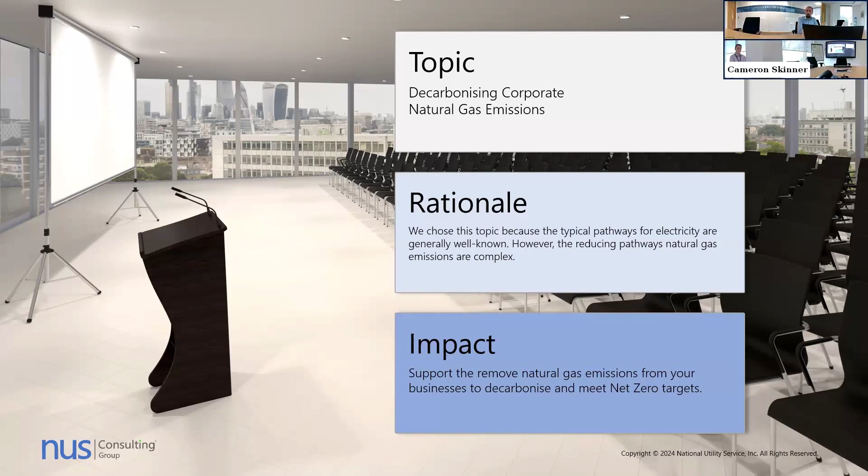So we will be guiding you through the process of the different levers available, what can be pursued on a short to long-term measure, and what that might mean for your particular company, your industry and broader sector. As part of that conversation, we will showcase the broader impacts, taking into consideration your requirements to reduce emissions with any net zero targets you might have in place or on the horizon.

Before we get into the more granular details and options around natural gas decarbonisation, it's worth reiterating the importance of decarbonisation for your company.

Under the requirements of the GHG protocol, there are various elements under carbon footprinting accounting, broken down into individual scopes. Scope 1 covers your natural gas consumption alongside corporate vehicle emissions and fugitive emissions, such as those from leakages in HVAC systems across your portfolio. Scope 2 primarily focuses on your electricity consumption.

There are 15 different upstream and downstream categories under scope 3, which vary considerably from business travel to purchased goods and services, employee commuting, and tracking the emissions of any products you manufacture and sell across your broader business operations.

From our experience working with large industrial and commercial organizations, scope 3 emissions typically account for anywhere between 75 to 95% plus of a company's overall carbon footprint. That can be higher again if you are directly manufacturing industrial products which require energy as part of their usage once they leave your factory and operations.

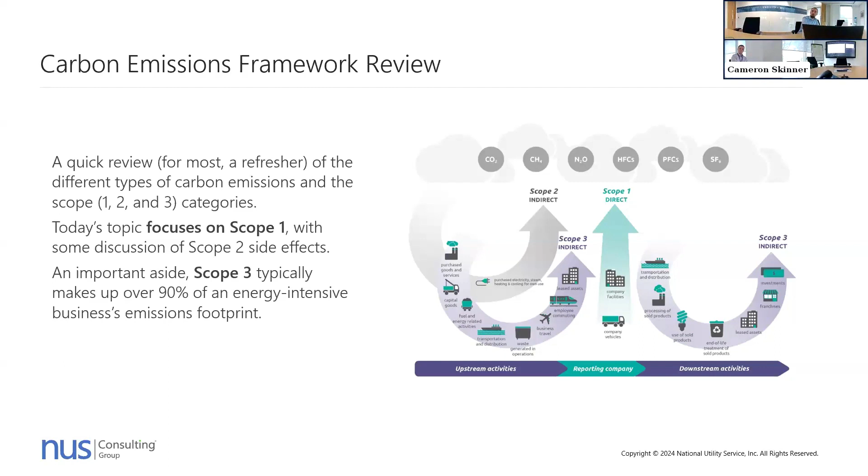To clarify why we are focusing on natural gas consumption, there are various considerations to be taken into play in relation to reducing natural gas consumption across your portfolio.

In terms of short-term requirements, any company with a net zero or decarbonisation target currently being developed or reported externally will be required to showcase they are proactively reducing emissions across their portfolio, including natural gas consumption, where you have the direct ability to make changes to how your business procures natural gas or carries out any business operations. Any clients currently aligning with or looking to align with the Science Based Targets initiative will...

...be required to quantify all of their consumption associated with natural gas and then publicly commit to reducing those emissions quite rapidly over the next 6 years up until the 2030 timeframe. Typically, companies currently aligned with the SBTi would be expected to reduce natural gas emissions by 50% by 2030.

Any company with a net zero target in place by 2040 or 2050 will be required to fully remove natural gas consumption from their business operations or replace it with a renewable alternative. As mentioned, natural gas consumption is under your direct and immediate control, so companies are expected to showcase they are proactively making changes to reduce natural gas consumption.

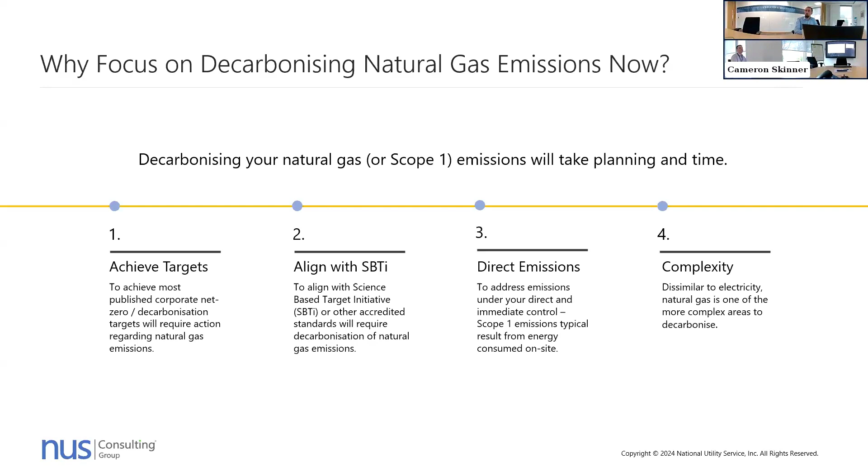The discussion will focus on 5 main decarbonisation levers focusing on natural gas consumption, including biomethane certificates, renewable gas supply, energy efficiency, electrification, and on-site generation.

These options vary considerably, from market-based measures such as purchasing biomethane certificates or renewable gas supply, through to more proactive measures such as energy efficiency and the electrification of your natural gas consumption.

As we will showcase, all of these have a variety of broader sustainability reporting implications, costs, and changes to the way your company carries out heating and manufacturing processes across individual sites.

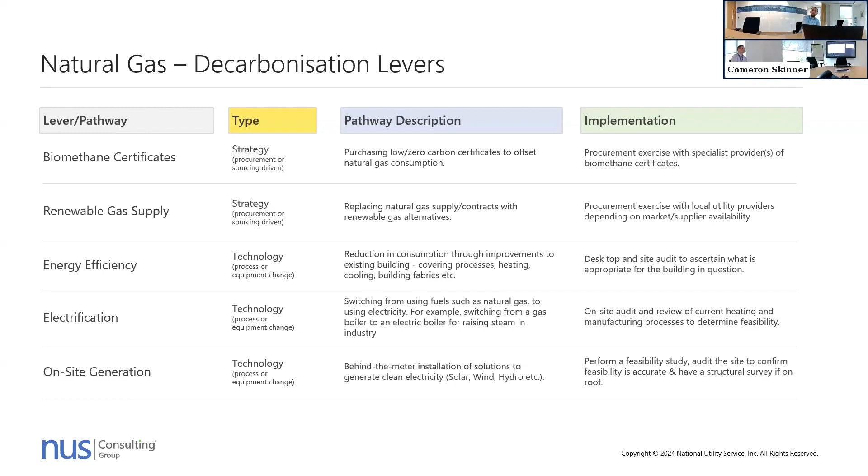To start with the first lever, one option available for commercial organisations to reduce natural gas consumption takes the form of biomethane certificates. In relation to electricity, for instance, the market is currently very well developed in relation to energy attribute certificates. In the UK, we have renewable energy guarantees of origin, or REGOs.

Across Europe, we have guarantees of origin, GOs. Across the United States and Canada, we have renewable energy certificates, or RECs. They have been in place for a number of years, are very well regulated, and allow companies to directly purchase them to report a direct reduction in their electricity consumption. It hasn't currently been the same situation for the natural gas sector or for biomethane certificates.

At the moment, the biomethane market, both for supply and certificates, is in the very early stages of development.

But there are options for companies to purchase biomethane certificates, also known as renewable gas guarantees of origin, or RGGOs, as part of a procurement exercise to purchase renewable certificates for gas consumption. They are typically generated per 1 kilowatt hour of generated biomethane, and can be purchased across a limited number of markets. At the moment, there is some market development across the UK, parts of Europe, and specific states in the USA. In comparison to the electricity market, the certificates are still developing in relation to regulation and trading, but we expect to see some advancement in this area in the coming years.

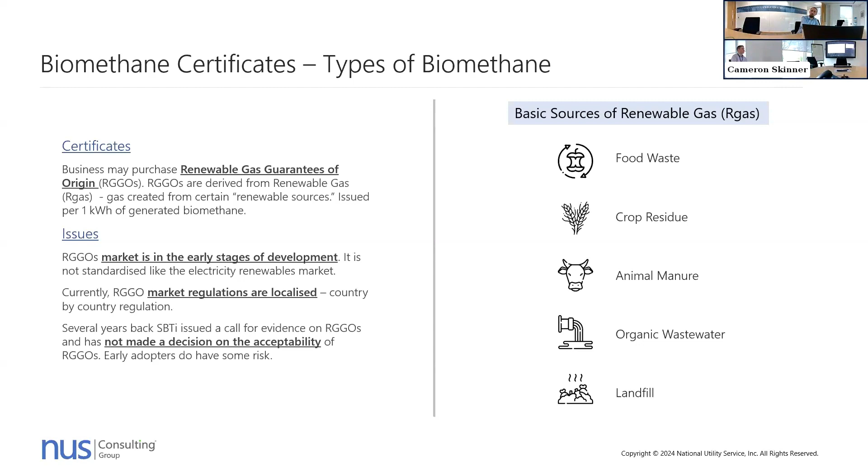It's also worth mentioning at this stage, any biomethane should always be directly generated from a waste source. So in this case, for instance, food waste or animal waste, which would otherwise not be put to use and would release more potent GHG emissions into the atmosphere.

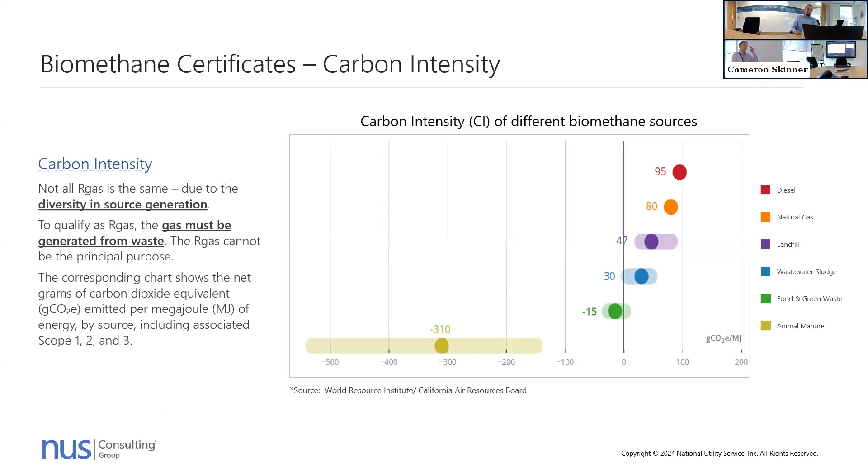There are a number of key considerations to understand and observe when making decisions around biomethane certificates. One is location. At the moment, biomethane is generated in a small number of markets, both in Europe, the UK, and across the United States. There is not the same generation capability across the majority of markets as there is for renewable electricity. The key factor also to take into consideration is the associated cost of biomethane certificates, and these can vary considerably, taking into consideration location, sustainability standards, and the mentioned carbon intensity score.

At the moment, biomethane certificates are at one of their lowest points in the market, and can be purchased across parts of the UK and Europe for around £9 to £10 per megawatt hour. But they do fluctuate and can go up to around £60 plus per megawatt hour for biomethane certificates with a negative or zero carbon intensity score, and those which have been purchased from sustainability certified standards. There are various organisations that can certify the broader sustainability impacts of different biomethane sources, such as the ISCC.

David, if I can interrupt you, I'm sorry. We did have one question which I think is timely. One of the questions was, what is the level of recognition amongst the different bodies with regard to biomethane certificates, and how standard of practice is it? If they're not recognized, what's the point of purchasing them?

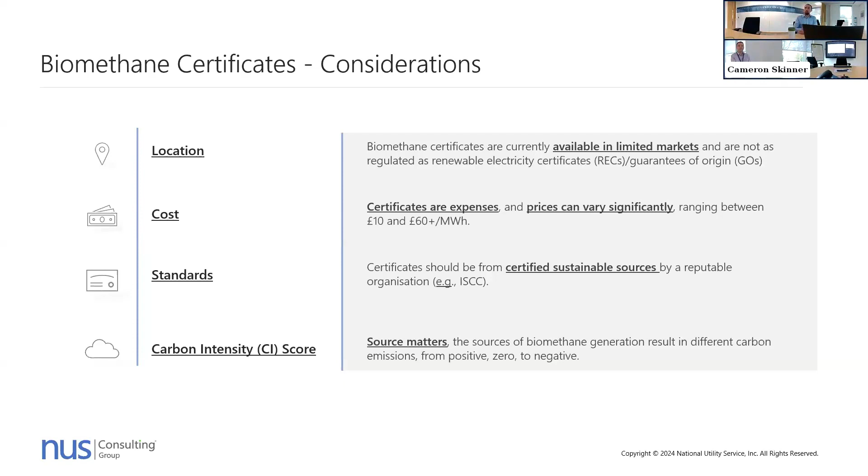So any company looking to purchase biomethane certificates would then have to contract with a specialist provider to obtain specific quotations for their gas consumption, taking into consideration the markets in which they operate and the time periods which they need to cover.

That leads us on to the second decarbonisation option for companies focusing on natural gas decarbonisation. Similar to biomethane certificates, there are options available for renewable gas supply. Unlike renewable electricity, which has very well regulated and uniform, standardized markets across the UK, Europe, and the United States, the current situation for renewable gas is also in the early stages of development.

Similar to biomethane certificates, renewable gas can be generated from a variety of sources, including food, animal, and agricultural waste. This would enable a company to directly procure with a renewable gas provider to meet their gas consumption requirements across individual sites or their wide portfolio, as you would contract for the supply of renewable electricity.

Like biomethane certificates, at the moment this is still in the early stages of development across most markets. There is some availability from suppliers across certain parts of North and Western Europe and certain states in the USA. But at the moment, even where suppliers are able to provide a proportion of renewable gas to meet the requirements, typically they can only meet around 10 to 20% of your gas consumption requirements through the provision of renewable gas.

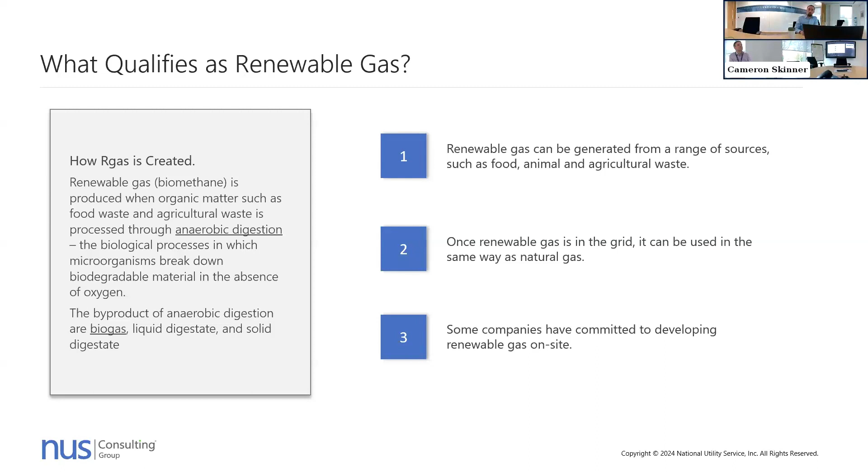Just to echo some of the main barriers for renewable gas supply: currently limited to certain markets and certain suppliers across the majority of the world. Due to its limited availability, most suppliers can only meet a very small proportion of overall gas consumption requirements. Again, similar to biomethane certificates, there will be a considerable uplift in costs due to the lack of availability across the majority of markets, even those which are more developed in relation to renewable energy generation.

The most important implication for any company to acknowledge is, at the moment, this wouldn't enable you to make a direct reporting reduction in Scope 1 emissions. Any company purchasing either biomethane certificates or renewable gas would be required to make that fully transparent within any external reporting requirements or frameworks until we have clarification from the leading international standards.

Some companies are looking to procure renewable gas supply as a short interim measure, whilst they look to develop more proactive plans for reducing gas consumption, such as on-site generation or electrification. So we are seeing some movements with certain markets and certain companies directly purchasing renewable gas supply as a short-term fix before they advance on more on-site technical solutions.

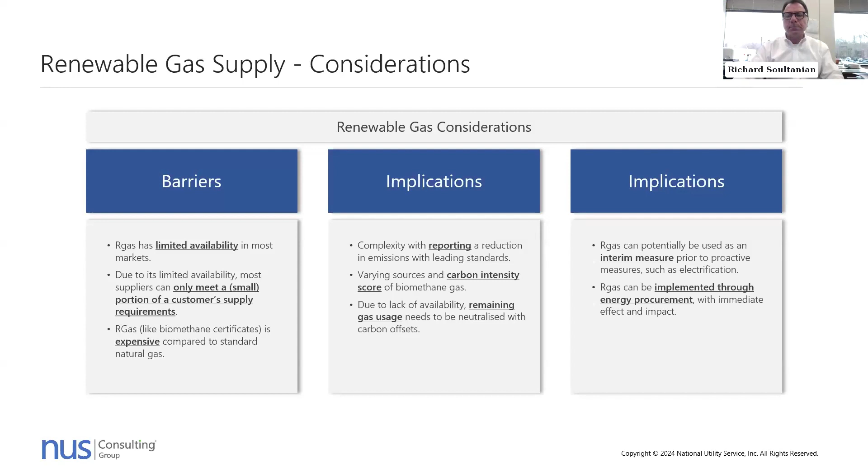Okay, Cameron Skinner speaking. This is where I take over from David. It's important to note that David's been talking about the procurement of certificates and renewable gas.

From this point on, we're going to be talking about technology and how that can help remove natural gas. Over the next few slides, I'll discuss moving natural gas out of the business through energy efficiency.

By no-cost actions, we're typically referring to monitoring existing data and heating controls of the building. Monitoring existing data means reviewing any natural gas data you already hold. It could be a monthly review, or you could collate data for 2019 and 2023, for example, and compare those years to see how usage has changed.

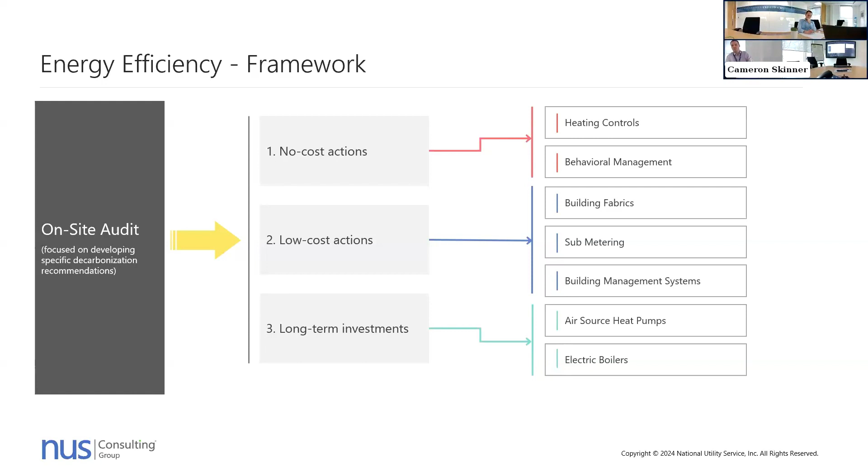Still under the energy efficiency banner, I wanted to raise heat pumps, simply because for most businesses that use natural gas for heating, they're a very good way of stripping out that natural gas and acting as a direct replacement. For those unfamiliar, heat pumps are an alternative way of heating the building as opposed to the conventional way of using natural gas. As a side note, they can also provide cooling and in some cases hot water.

As you can see on this icon, air source heat pumps capture heat from outside air and move it into your building, as opposed to ground source heat pumps, which harness natural heat from the ground through a series of underground pipes and move it into your building. The key takeaway is both of these solutions use electricity. So in most cases, depending on your gas demand, having a heat pump allows the removal of existing gas boilers and all the associated components.

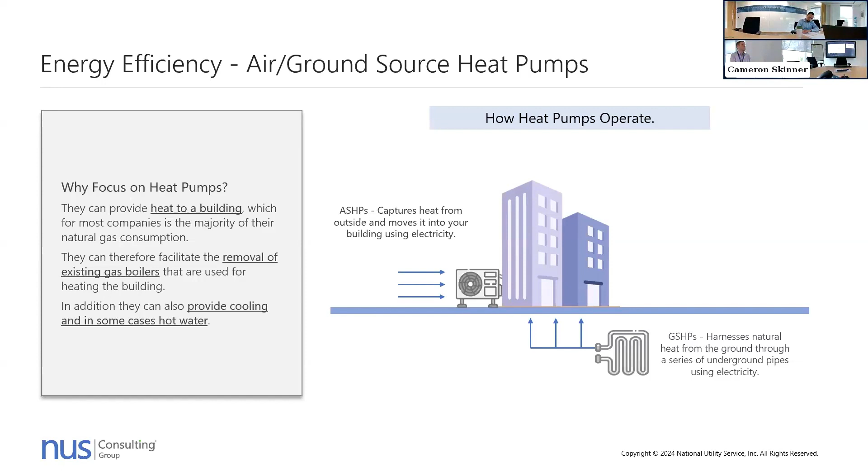As a comparison between them, they both provide heating and cooling, whereas ground source heat pumps typically also provide hot water. The real difference is installation: air source heat pumps are typically easier to install than ground source heat pumps, given that ground source heat pumps require excavating land around the building to install underground pipework. With that complexity comes a cost increase. So compared to ground source heat pumps, air source heat pumps are fairly cost effective, whereas ground source heat pumps are a longer term investment.

And I think just to end on that comment, for every 1 kilowatt hour of electricity needed to power a heat pump — either air source or ground source — the output of heating is typically 4 kilowatt hours delivered to the building.

And I guess the takeaway, just to summarize... Can I interrupt you? There's a good question on heat pumps, and it's probably a good time to ask it. Someone attending the webinar found challenges implementing heat pumps, particularly in sites located in colder weather, such as places in North America and China, where winter design temperatures are -10°C to -20°C. What would your recommendation be about heat pumps in these colder climates? Are they effective, or would you have other recommendations?

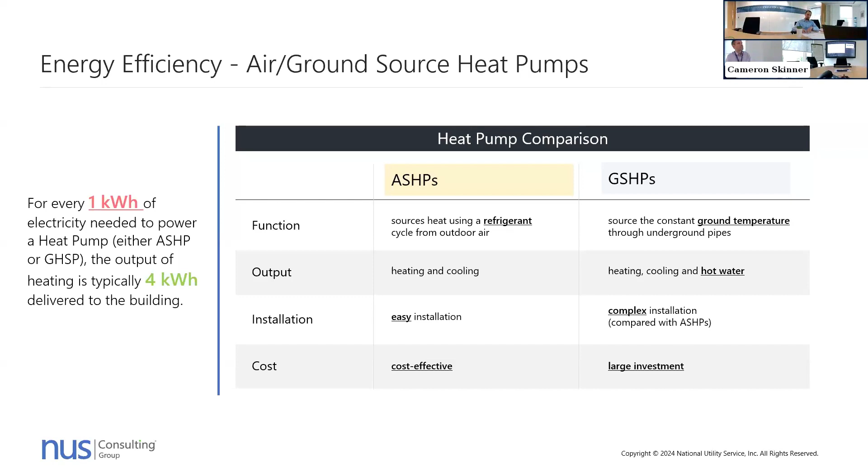Now, without really putting a title to it, we've already been discussing electrification in the last couple of slides. For everyone's benefit, electrification is the removal of natural gas from your processes in your building and the replacement with electrical solutions. I think the reason we wanted to highlight this slide is that for most companies, if you're using gas for heating, there's a clear path to replace that natural gas via heat pumps and electric boilers. So you have your process — it's just about deciding as a business when your net zero targets are, and when you need to stop using natural gas by.

For any company or organization that has gas for a process, so if you're a manufacturing company making a product, this becomes much more difficult because you're effectively saying you want to remove a product that is directly responsible for making your business money. So if you have any kind of supply chain that relies on gas, it could be the chemical sector, iron and steel, food and beverages, anything that requires natural gas in the process, it's going to be very difficult to remove that from your process with a solution that's electrical.

So for that area, we want to cover a bit more detail. It obviously depends on what sector you're in, but typically the best way to remove the natural gas is, one, to have a call with an engineer and do a desktop feasibility study to understand how the natural gas is being used, what type of consumption we're talking about, what your operating hours are, and then a follow-up site audit that doesn't just have an engineer attend for the day - they typically stay around 4 to 5 days, the whole week, just to see those processes happening and work out how they can replace that natural gas.

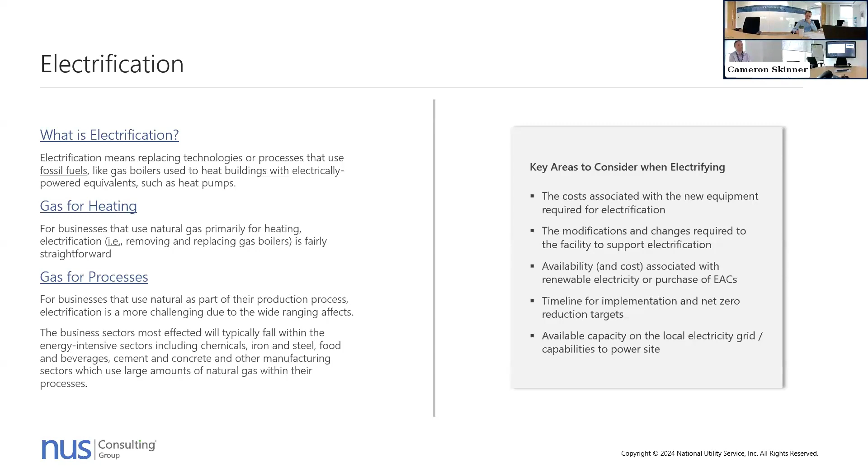And maybe, Cam, if I could jump in there for one minute. The last point that Cam highlights is a great concern to us on the procurement side and other sides of the business, in that if you look at the grid and generation capacity today, the more electrification we see natural gas make that transition, the more we're concerned about the availability of electricity and the system to deliver it. When you look at the transition to EV vehicles, the electrification of large manufacturing and process, and then finally the growth in data centers and AI, the demand for electricity is going to be quite substantial.

And that clearly is a concern going forward as you model these types of transitions. And more importantly, when you look at the underlying profile of the grid, as we move more towards sustainable electricity, you can see throughout Europe and the US that price volatility, from quite high to negative, is growing. And as a consequence, the movement towards electrification has greater considerations.

Sorry to interrupt you.

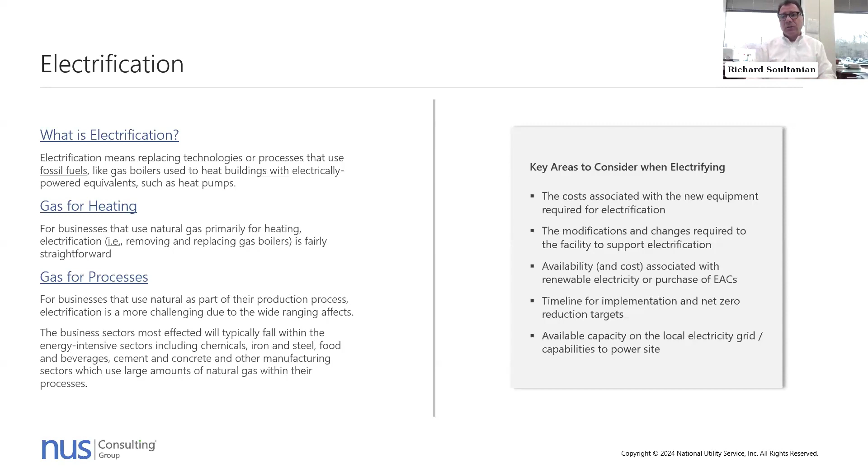That's fine, thank you. And then lastly for myself, on-site generation. So the focus of this presentation has been the removal of natural gas from organizations' portfolios. However, with that removal, as we've started to touch upon, you're going to have an increased reliance on electrical solutions. So your electricity use is going to rise, and therefore your cost is going to rise because typically electricity is more expensive than natural gas. So to support that and really mitigate the electricity rise you're going to see as you remove all of your natural gas, we've put in on-site generation.

Now, when we say on-site generation, we're talking about behind-the-meter installation. So that could be, for example, solar - solar on your roof or solar on the ground around your building. It could be wind if you have the appropriate land. And then to support that, whenever you generate electricity, any of that electricity you're not using within your business, you could look at battery storage as well.

Now, again, there's many benefits, many barriers. I think the key thing I'll focus on is the point Richard just mentioned: de-risking of energy price volatility. So if energy prices rise for whatever reason, a part of your electricity has been segued away for generation, and that's covered, so you're taking away the cost. It's also, as we talk about sustainability, a very positive message for your clients, future clients, for your employees, and just general CSR targets. It's very much a message you can say: we've decided to generate our own electricity. This is what we'd classify as additionality.

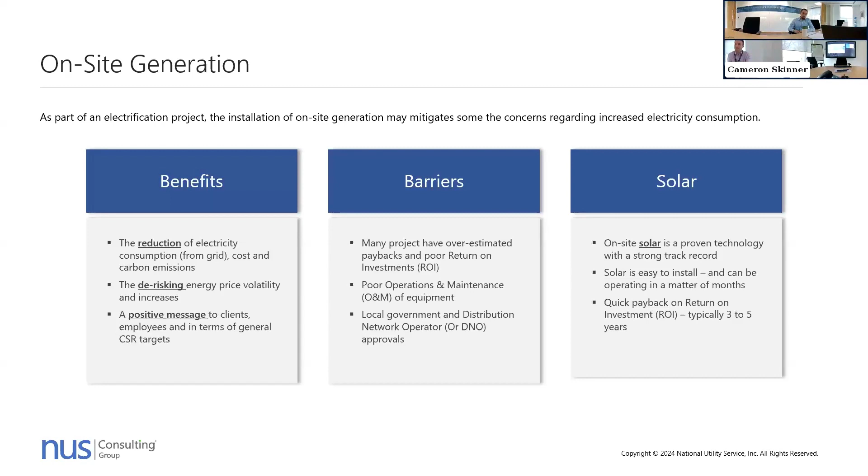Maybe before we go to takeaways - we've had several questions concerning green hydrogen and the consideration of replacing natural gas with green hydrogen. And also, there hasn't been a big take-up so far in green hydrogen. Do you have a view on the development and evolution of green hydrogen and its use?

We know a number of companies are hoping green hydrogen will be the savior of natural gas decarbonisation. We haven't spent too much time on it in this webinar, as we're addressing measures currently available on the market. Hydrogen is a longer term ambition. In some markets like the UK, there's a hydrogen strategy with trials starting in certain industrial clusters over the next 5 to 10 years. But at the moment, it won't address short-term natural gas decarbonisation efforts or targets for 2030. It is slowly being introduced in different studies and trials across the UK and parts of the US, but for now it's something we have to keep an eye on as the market develops. For companies looking to make proactive reductions in natural gas consumption between now and 2025-2030, it will definitely require the measures we've listed so far.